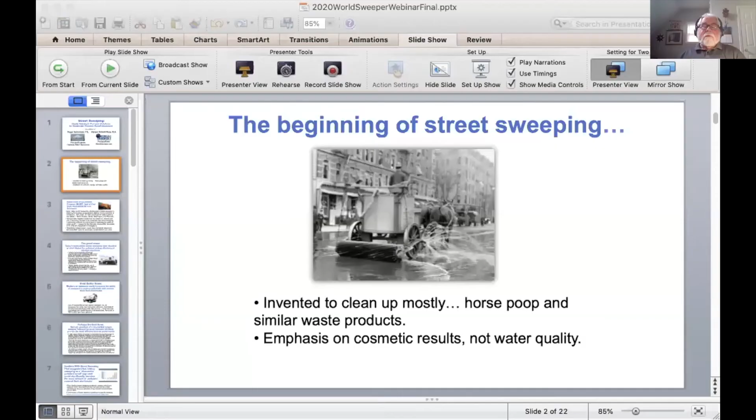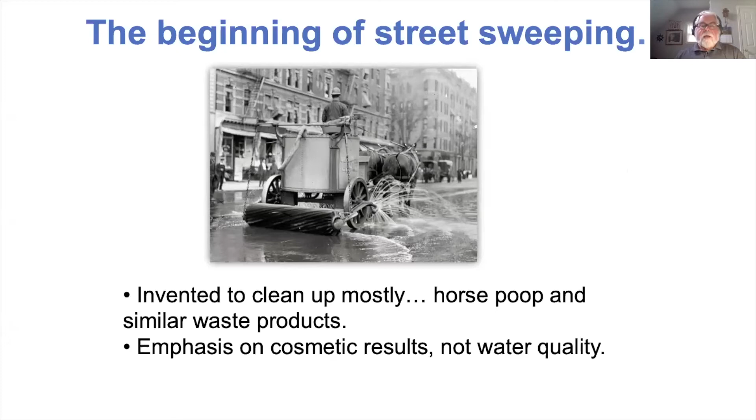In the beginning, street sweeping was invented mostly to pick up horse poop and similar waste products. So the emphasis was on cosmetic results and not necessarily water quality. However, when you think about it, if you were living in Chicago, for example, where I think this photograph was taken, around the turn of the 20th century, and you saw that contraption moving down the street, I think you would be pretty happy about it.

So starting back in the early 1980s, the US EPA conducted a series, or funded a series of tests conducted by many other participants. In fact, there were 30 of them, of various BMPs that could be utilized to remove pollutants from stormwater, which was the rage that had just occurred as a result of the Clean Water Act's passage in 1972. So early on, NURP, the Nationwide Urban Runoff Program, studied the effectiveness of street sweepers in reducing event mean concentrations for 5 different pollutants at 10 different sites located in 4 states.

And it was unexplainable negative results from 2 sites in North Carolina and 1 in Wisconsin that resulted in the conclusion, and I quote, "Street sweeping is generally ineffective as a technique for improving the quality of urban runoff." This conclusion occurred despite the fact that the data showed EMC decreases in 34 of the 50 site pollutant investigations. And statistically indeterminate results have hampered street sweeping's perceived BMP value for stormwater runoff pollution control ever since.

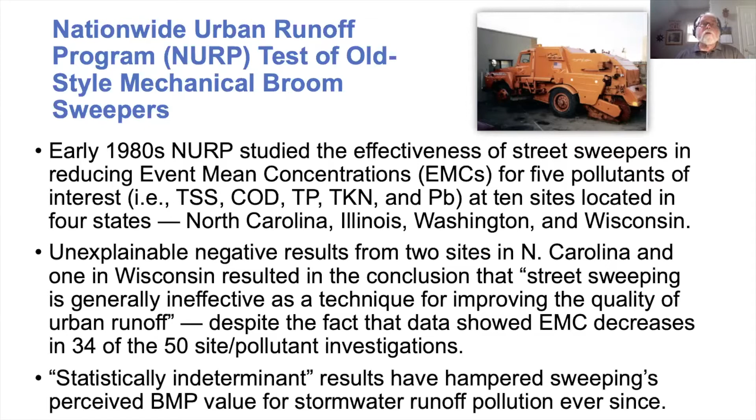So let's talk about what's changed. Let's talk about the good news. The good news is that today's mechanical advanced street broom sweepers, unlike the ones that were tested in the early 80s, offer much better particulate material pickup, including small micron pickup.

In fact, in 2008, I was hired by the Elgin Sweeper Company, and I performed performance testing on a number of their models at the time. And I tested the Elgin Eagle, pictured here in this slide, and it showed a mass pickup efficiency for particles 250 microns or less to be about 86%, which is much, much greater than the NURP era sweepers. They probably didn't pick up more than 10% tops.

Testing results in the tests we conducted also showed that the use of water, which is quite common to knock down dust, to deal with fugitive dust, actually resulted in a 20% reduction in efficiency, which obviously went down to something around 70%.

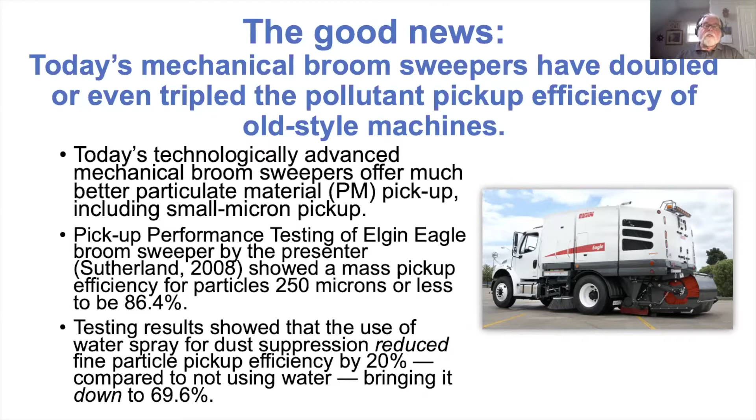So the better news is that today's modern air sweepers, now air sweepers are regenerative air or vacuum machines, have vastly increased the ability of sweepers to pick up pollutants and remove them from stormwater. In fact, in our tests of the Elgin Crosswind, which is their premier regenerative air machine and also pictured in the slide here, they were able to achieve 90 to 95% pickup in the under 250 micron range. And the reason we have a tendency to focus on this range is that this is by far the most bioavailable and mobile fraction of all the debris sizes.

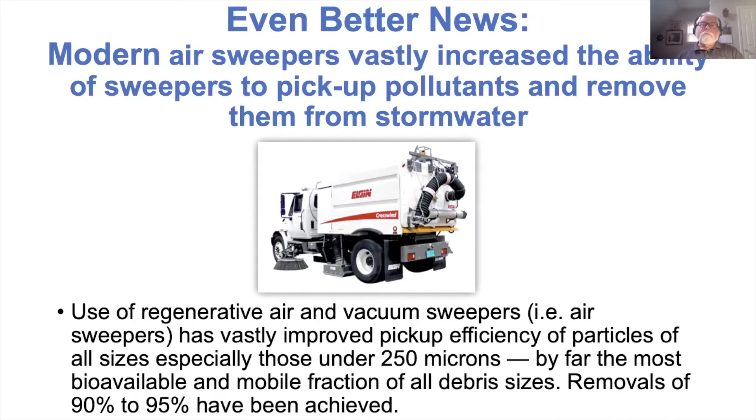However, what many people perhaps aren't aware of is perhaps really the best news. And that is what I was mentioning in the introduction, a tandem operation. A tandem operation is simply a mechanical broom sweeper followed immediately by an air sweeper. And we believe that this operation may prove to be the most effective pickup performance you can achieve.

In 1994, as I mentioned previously, I did a study and reported on it at APWA in Chicago. And that study was to monitor the pickup performance of a monthly tandem sweeping operation, and I used before and after street dirt sampling, against that of a standard mechanical only operation. We did this over a 6-month period, and we found that on the average, the pickup of particulate material, street dirt, if you will, from the tandem operation was 74% versus approximately 40% for the standalone broom operation.

So you see, these results help to explain the 16 site pollutant NURP investigations that found higher pollutant concentrations after we were aggressively broom sweeping, actually twice a week. Because the broom sweepers of that era, as I mentioned previously, only removed the much larger material. Therefore, they exposed this fine material, which was easy picking for the storms that followed. In fact, a tandem operation has the greater capacity to remove fine particles, less than 250 microns. And as a result, the concentration of pollutants washed off in the storms that follow will be lower.

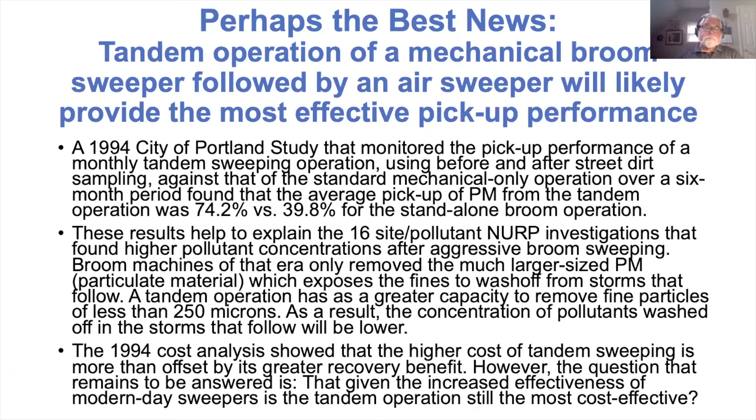So moving along, let's talk about some of the studies that have been done about street sweeping. We don't have much time, and I'm only going to focus on a couple. In 2009, the city of Seattle, which, by the way, largely abandoned their street sweeping following the conclusions of the NURP, as so many other communities did throughout the country, conducted a pilot study. I was involved in that study. I did the initial scoping of the work, and I also was involved in training the personnel in the street dirt collection procedures and that sort of thing.

But I wasn't involved in the actual work itself or the conclusions that were drawn. And what it found was that the work suggested that a stormwater pollutant runoff approach could significantly increase the mass amount of pollutant removal from stormwater. And in fact, when Seattle enacted their sweeping as an adjunct to their existing end-of-the-pipe solutions, they were also doing catch basin cleaning in 2011, they determined that over a 2-year period, they increased the amount of pollutants being removed from stormwater by over 300%. Further study made them realize that they needed to double their budget for sweeping, and they have done that.

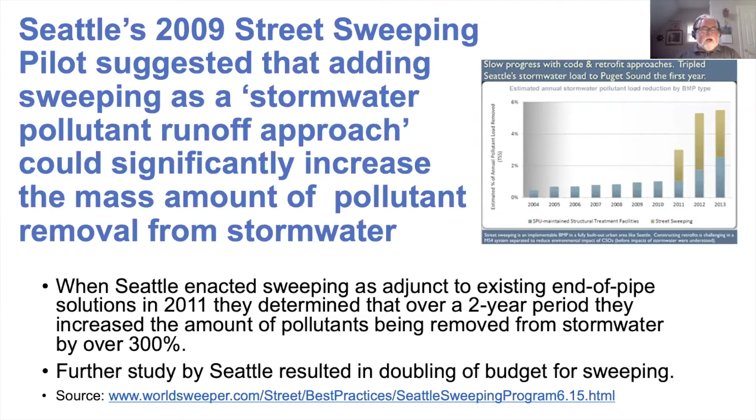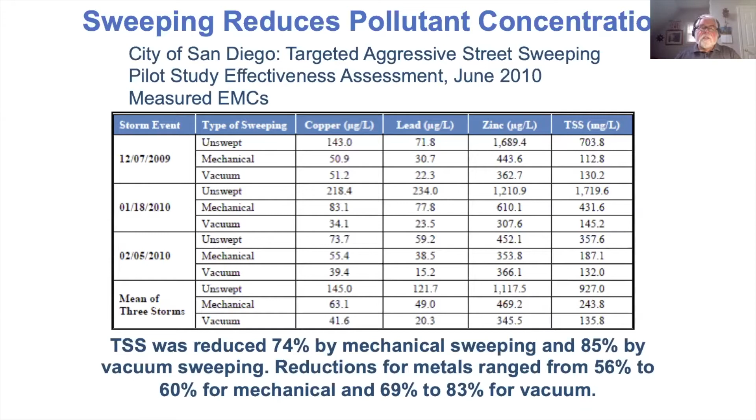Now, let's fast forward to today, or in this case, it would be 2019. In 2019, the University of Florida released the final of 3 documents that they published over a period of 12 years, documenting studies that they conducted in association with up to 14 Florida MS4s and in association with the Florida Stormwater Association. And what they found was street sweeping was the best BMP. That's up to 7 times more cost effective than any other BMP that you could possibly use for the removal of total nitrogen and total phosphorus from stormwater.

The studies measured the amount of material captured by the complete range of all available BMPs, from sweeping to catch basin cleaning to a variety of structural end-of-the-pipe measures. And each of the MS4s calculated very meticulously what the cost of capturing a pound of nitrogen or a pound of phosphorus was for each of the BMP recovery methods. And street sweeping was the lowest cost per pound. Catch basin was second in all instances.

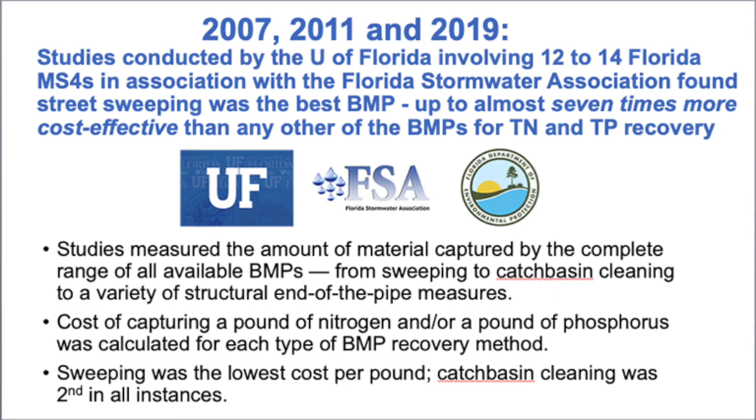Now let's look at some of these numbers because they're pretty impressive. Here we have the relative cost of removing total nitrogen, $189 a pound. That's street sweeping. Catch basin cleaning is $1,160 and change. And this is basically the median cost of all of the best management practices that you could possibly undertake. I think it's the median, it could be the mean, I'll have to check that, but my bad. In any case, look at that number, 2,173. Now let's go on to phosphorus.

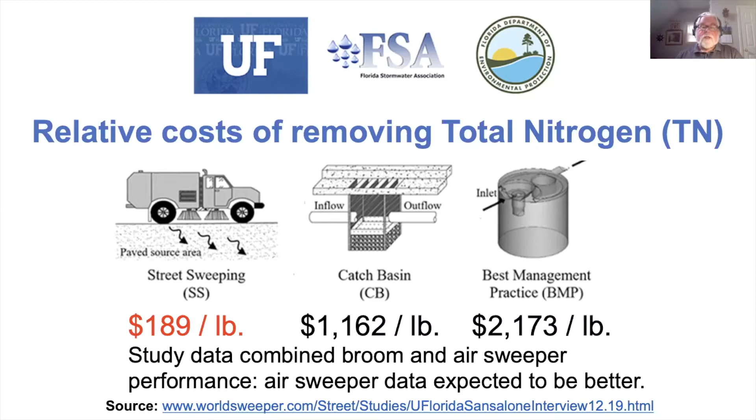So phosphorus, which obviously seems to be more of interest to more communities throughout the nation, it was $294 a pound, catch basin cleaning $1,894, and I think that is a mean of the best management practices that they did investigate, and I believe there were 4 of them, end of the pipe solutions, if you will, $12,000.

And one final comment on this effort is the data that they collected did not differentiate between a broom and an air sweeper. And we've advised Dr. John Sansalone, who Ranger interviewed about this project last December or January in his World Sweeper.

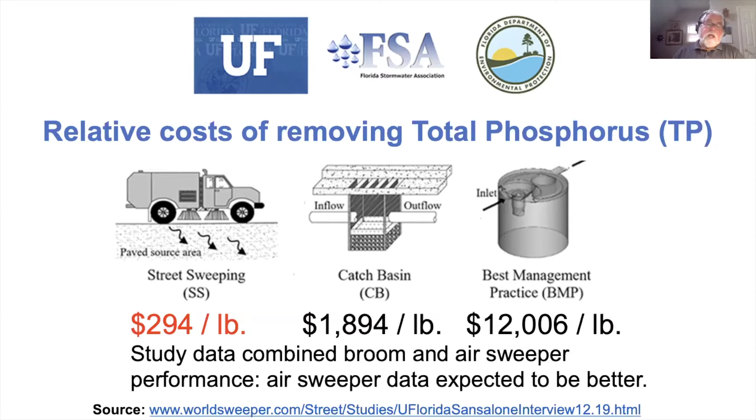We told him that if he were to separate those 2 databases, he's liable to find that the air sweeper will have done even a better job than the broom, but we don't know until he does that. So let's look at the conclusions of this, what I call game-changing study.

The recovery of particulate material matters. And this study basically proved that street dirt pickup recovery also matters. The Florida studies found street sweeping to be the most economic and dominant practice that MS4s could implement and optimize in order to maximize nutrient and particulate material recovery benefits to urban drainage systems and the receiving waters they discharge to. The study showed conclusively that the recovery of particulate material matters.

The more PM an MS4 recovers, the more the pollutants are reduced. In fact, this sentence says it all. The study results are statistically defensible at 95% confidence level when combining all 14 MS4s for PM, TN, and TP.

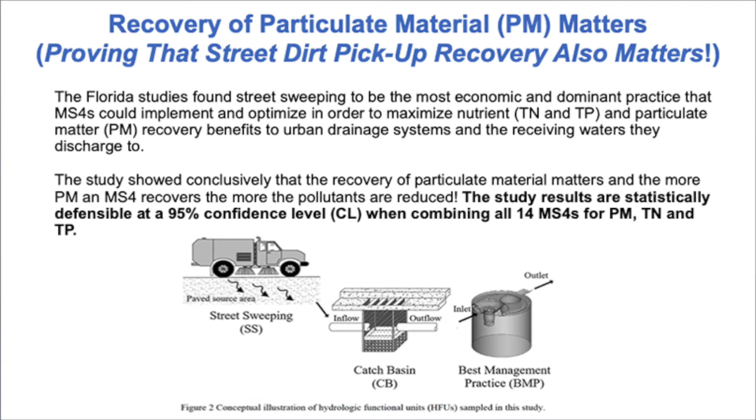So the final slide in my present portion of the presentation: I want to talk about how a street sweeping program can increase its ability to collect this contaminated material and to collect it more effectively. There are a number of things that a program can do. And let's just spend a few minutes talking about these.

Number one, we talked a little bit about the type of sweeper and the operation used. Particulate pickup performance is important, and well-maintained air machines appear to be a little bit more effective than well-maintained mechanical ones. However, tandem operations that I talked about may in fact prove to be the most cost-effective.

And I'm thinking about more specialty pollutants like PAHs, things that are highly associated with the very fines. These are toxic pollutants that have an affinity for attaching themselves to fine material. We don't know the answer to this question. We're just looking for someone that's willing to hire us to help them understand what they need to do to figure it out.

The second thing, and this is very important, is the forward speed of a sweeper. Now, your street sweeping manufacturers are generally going to recommend that you sweep between 3 and 6 miles per hour, especially for heavy accumulations. However, I've conducted numerous studies that have shown that sweeping in the 8 to 10 mile per hour range only reduces pickup performance by 10 to 15%. And your program ends up sweeping way more miles in a sweeping shift, thus removing more particulates and associated pollutants.

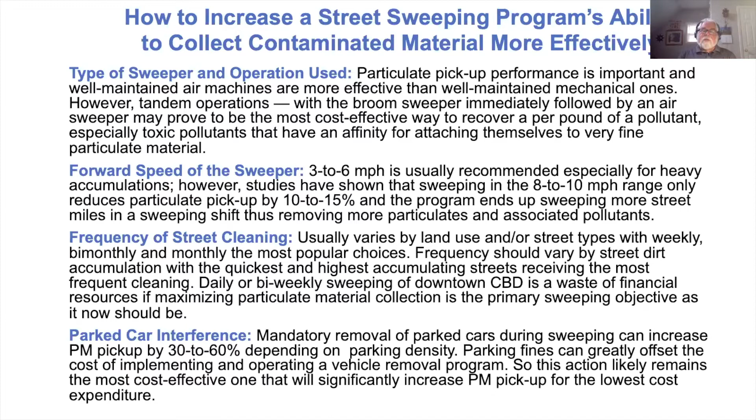And the fines that these can generate can offset a great portion of the cost of implementing and operating a vehicle removal program. So this action likely remains the most cost-effective one that will significantly increase PM pickup for the lowest cost expenditure.

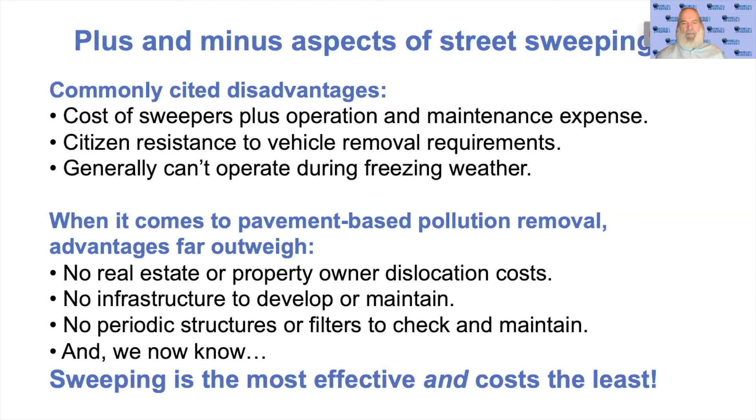So the advantages, as the headline says, far outweigh. There's no real estate or dislocation cost to property owners with this particular method. You don't have an infrastructure. There's no grassy swales or settling ponds or even catch basins that you have to develop or maintain. You don't have to check on filters and so forth. And now, most definitively with the University of Florida test results, we know that sweeping is the most effective and costs the least. So let's talk about some ways to enhance the value of street sweeping to your community.

It's really important that the software is out there. Roger Sutherland's SIMPTM software can really accurately model your pollutant removal, and it's much more expensive to try to run paired basin studies. The software models given rainfall over the different years and models the wash off, and it can really be a cost-saving way to find out what you should be doing in your area to hit your stormwater goals. Then you can allocate your sweeping program resources to put the right sweepers in the right places at the right times.

And one of the tips that I push to public works directors when I talk to them and when we do seminars is add your sweeping department to your stormwater department in order to maximize the efficiency of both of those. Now, these days, there are ways and methodologies to get money for the stormwater departments. Usually, this is a surcharge on garbage pickup. So what we hear all too often is, yes, we're throwing all this money at our stormwater pollution removal. And then when you say, well, how about sweeping? They say, well, sweeping's expensive, and so we do that as much as we can. The actual fact of that is sweeping is, as Roger already alluded to, up to 7 times less expensive if you're going to be sweeping for water quality.

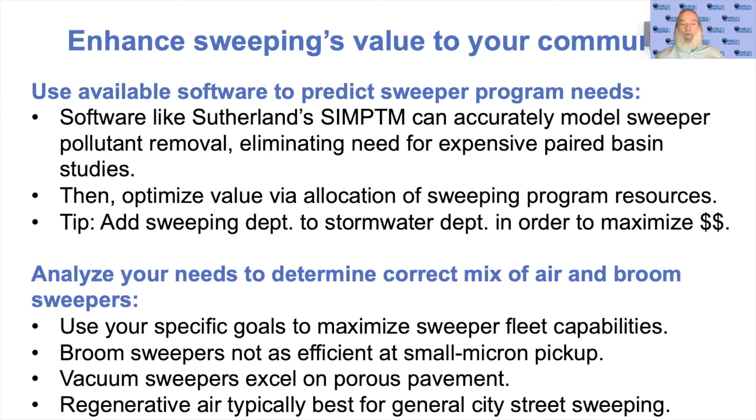And then for general city street sweeping, regenerative air sweepers are the way to go. We've seen that they provide the best pickup of small micron debris as well as regular debris. Let's talk about some other aspects of sweeping.

Now, some cities, but not many, have implemented some kind of value-added system with their sweeping. What this particular one shows you is you can put a keypad onto a sweeper chassis and educate your sweeper operators. It can all be linked via GPS online, so that, as you can see, if you push number 3, the operator noticed that there was a sign down, and you'd send that to the department that puts signs back up.

If you had low-hanging branches, let's say that's number 6, he pushes number 6, GPS shows where that sweeper is at that particular point, and that notice goes to the department that's in charge of going out and tree trimming. And potholes, number 9, would go to Department C. It's easy to have up to 10 different designations that can go to 10 different departments if that's what you wanted.

I also recommend that you put graphics onto your sweeper so that you can talk about your civic goals and what sweeping does. Have, for example, modules that go into your classes, 5th grade is often one that's chosen, where they learn about stormwater and what sweepers do. You can have touch a truck events to alert kids as to what those machines are, and then have an art contest with the winners having their graphics go on the side of your sweeper.

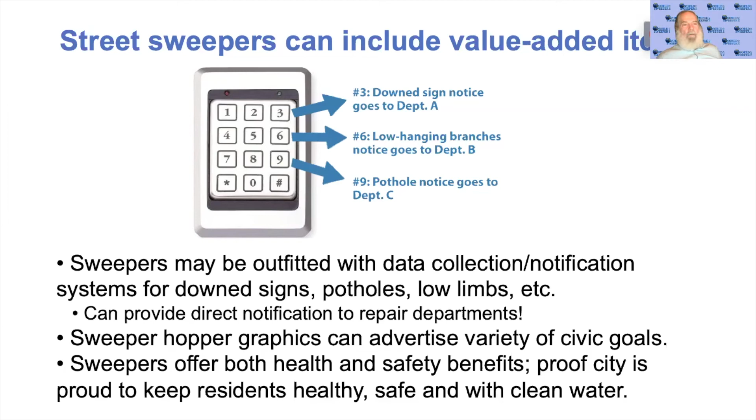And once you do that, and make sure that your residents know about the health and safety benefits that sweeping offers, you'll find that your citizens will be much more obliging with moving their cars, and they'll be proud that their city is involved to keep the residents healthy, safe, and with clean water. This kind of education is really important to reduce any kind of friction with your citizenry. Teach your city on your website and with handouts about the value of pollution removal with street sweeping.

With these touch a truck events, don't just have them touching the trucks and crawling all over them, but be sure to have handouts that talk about what kind of value sweeping offers for pollutant removal, keeping the fish alive, and that sort of thing. Always make sure to have good information online and on your handouts. And having grade-specific education in schools is a way to develop adults that will have those same kinds of values.

Now, one of the things that is often not thought about is when people say, well, gee, I don't want to move my car. It's just one car. What kind of problem is that? Well, one parked car is 3 spaces because the sweeper has to go out around the car and then come back in. So if you have just 2 or 3 cars per block, that whole block could end up not getting swept. And once the cars move, you see not only unsightly areas, but it's unhealthy. It's a rodent attraction problem.

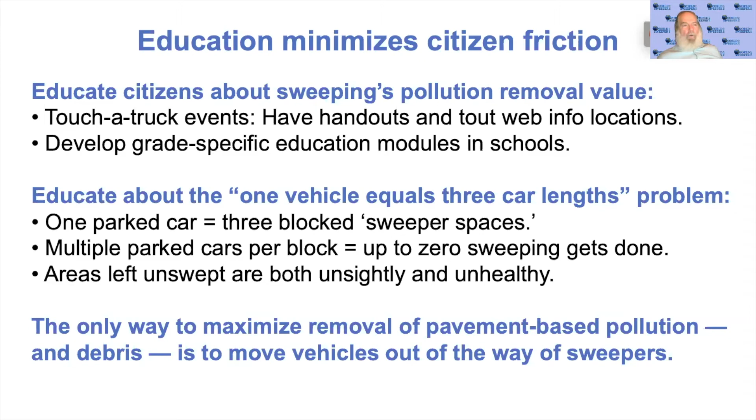It can be slip and fall issues and so forth. So if you want to maximize removal of your pollution and debris, and cosmetically as well to make your city look as nice as it can while you meet your water quality goals, move your vehicles out of the way of the sweepers. And the good news is that debris removal from sweepers is by far the least expensive way to keep your pavement looking good.

This is a quote from Dr. Sansalone, who was the principal investigator for the study that we cited. You can see the source there on my World Sweeper website. So I encourage you to check that study out. And I'm going to read it because I think it's a very important quote.

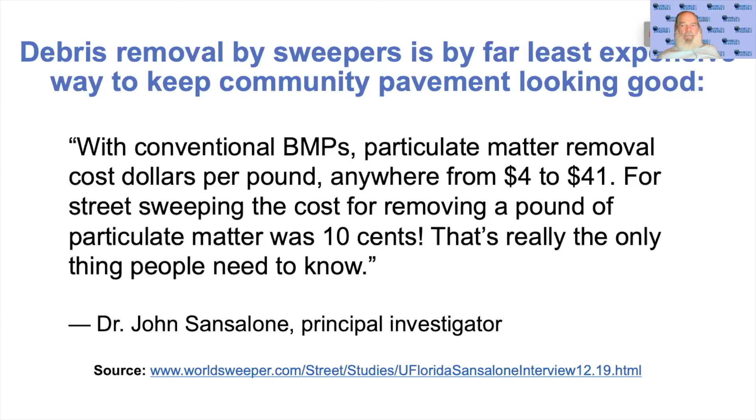With conventional BMPs, particulate matter removal costs dollars per pound, anywhere from $4 to $41. And they found that with street sweeping, the cost of removing a pound of particulate matter was 10 cents. And that's on top of the fact that removing phosphorus and nitrogen was nearly 7 times more cost effective. And as Dr. Sansalone said, that's really the only thing people need to know.

Now, for your sweeping program, we really recommend that you develop as best you can a citizen-friendly car removal program. More good news: technological advances today can offer some very improved outcomes. Internet apps are one of the things that really can be a game changer for your sweeper program. You can have apps developed that are like Uber. For anyone out there that's used Uber or Lyft, you know what that contrast is while you're waiting for your ride compared to what it was like with a cab.

There's no reason that you can't have an Uber-like app that can show where your sweepers are. Your citizens can log on to the city database that has their sweeping route on it, and then set it up where they can say, well, here's what I want for reminders. I want to get a text message the day before the sweeper is going to be coming. I also want a text message, let's say, when the sweeper's a mile away. And then I want another text message when the sweeper has gone by.

Now, one of the things that we're in right now as this conference is being conducted is a pandemic. When this pandemic started, there were about 5% of people working from home. And it's estimated that by mid-2021, that number is going to be about 30% of people working from home. That means there's many fewer places to go move your car.